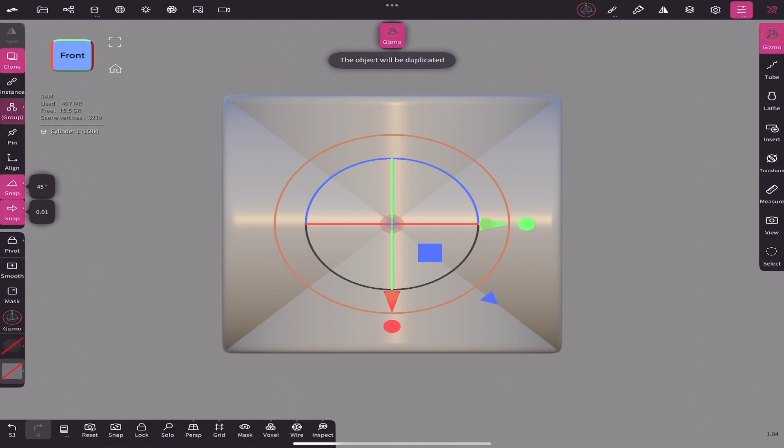Duplicate and rotate. Make sure the snap tools are enabled. Duplicate it, move it to the side, scale it down and validate it. Duplicate it again, flip it to the other side, position the pivot on the center. Duplicate it again, scale it down and move it up.

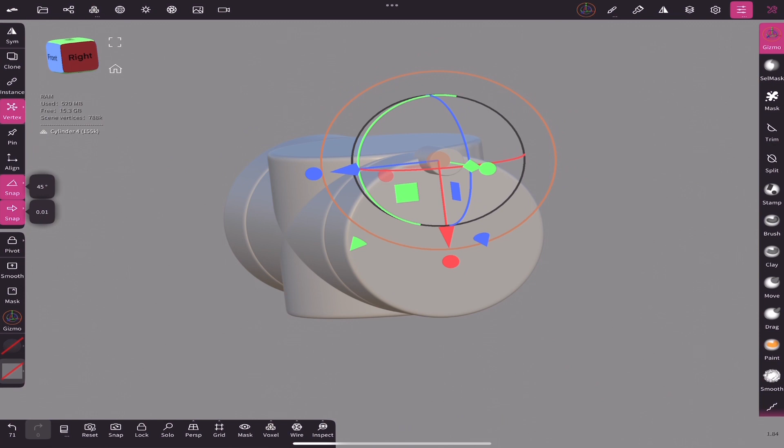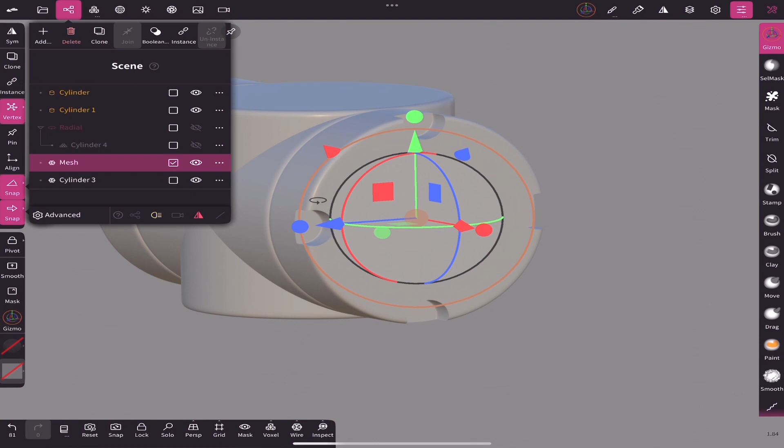Add a radial modifier. Duplicate the radial and the cylinder. Use one of them to punch holes. And use the other one as nuts. Give the cylinder a glossy grey color. Join them together. This will be the servo back cover.

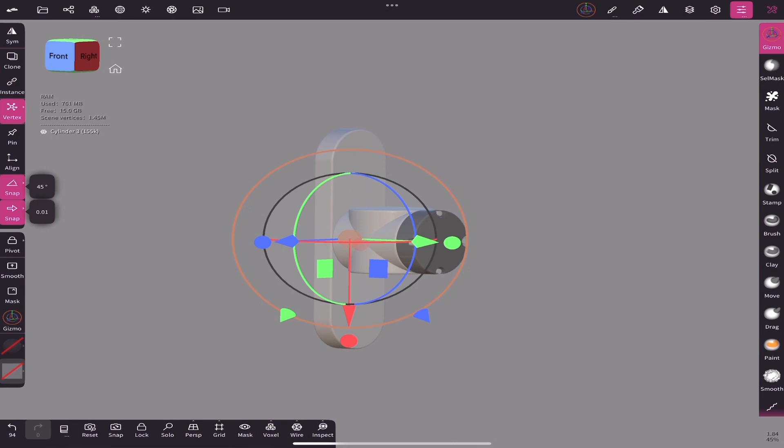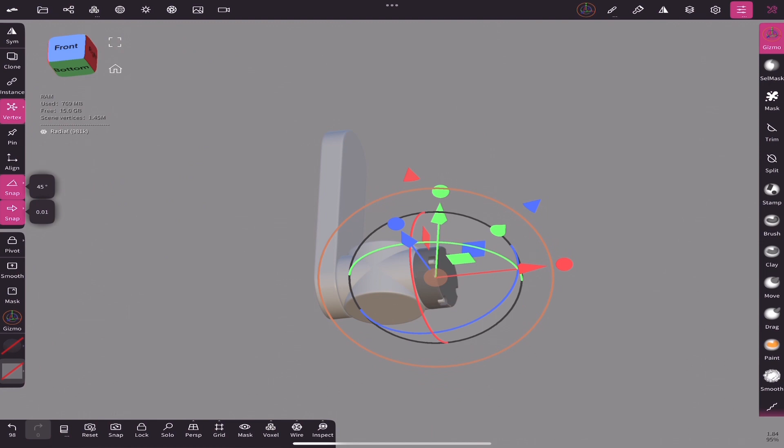Select the opposite cylinder, enable local symmetry and move it down. Disable the symmetry and adjust the position. Move the pivot to the bottom center. Move this cylinder down, then duplicate it and move it down. Join the two cylinders to shape a T-joint. Then center the pivot point.

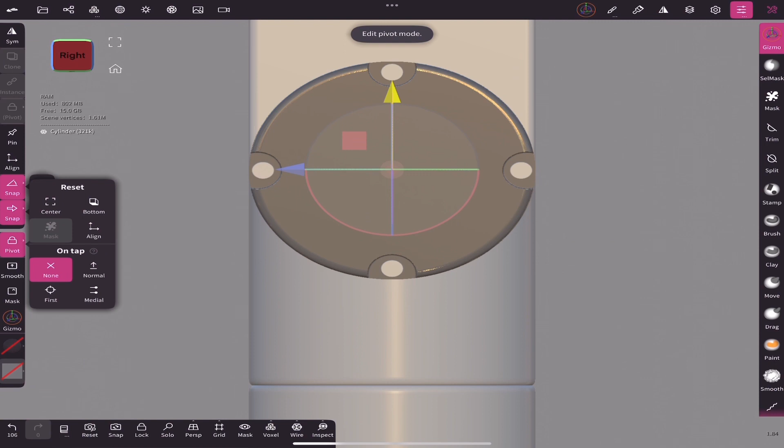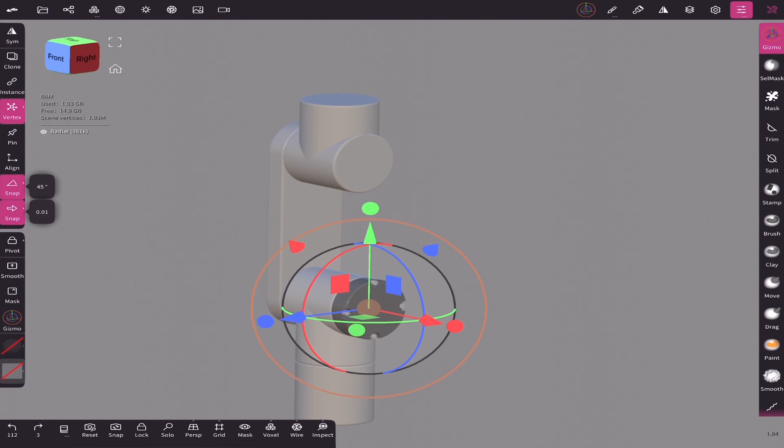Duplicate the T-joint, move it up and rotate it. Select the servo cover, select instance and move it up. If you want to move the instance, don't use the vertex target. We will use the vertex later to change all the servo covers.

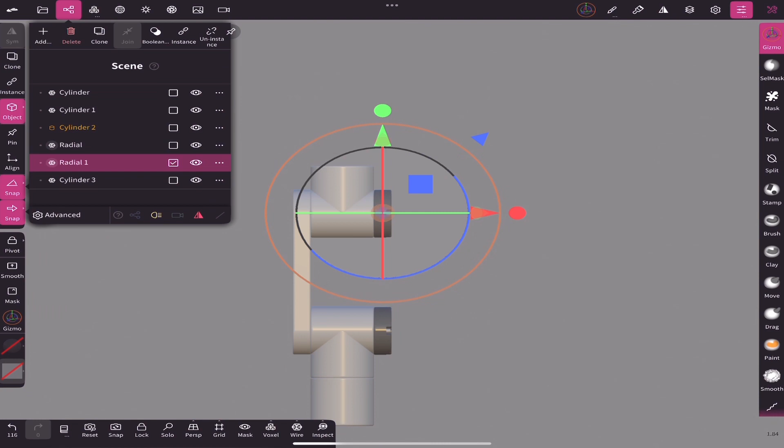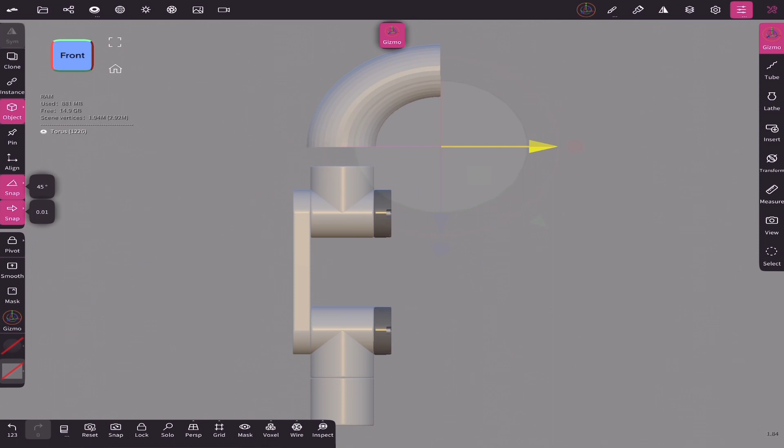Add a torus, rotate it and move it up. Scale it up, increase the inner radius, and to create a 90-degree joint, change the angle to 90 degrees and then change the angle offset to 180. After that, manually adjust the size and the position to align it with the other parts.

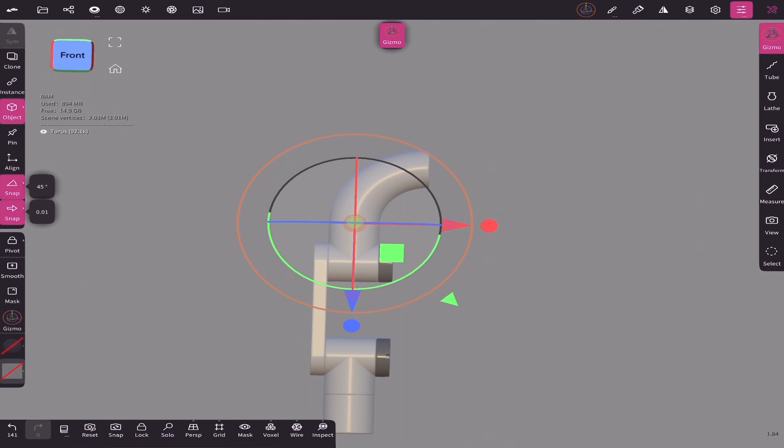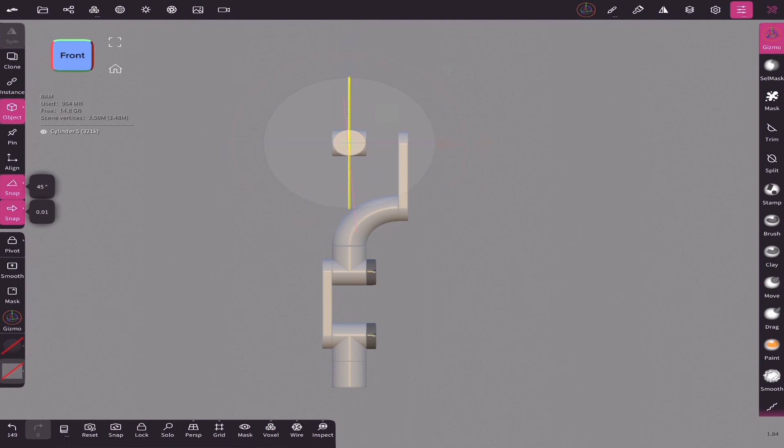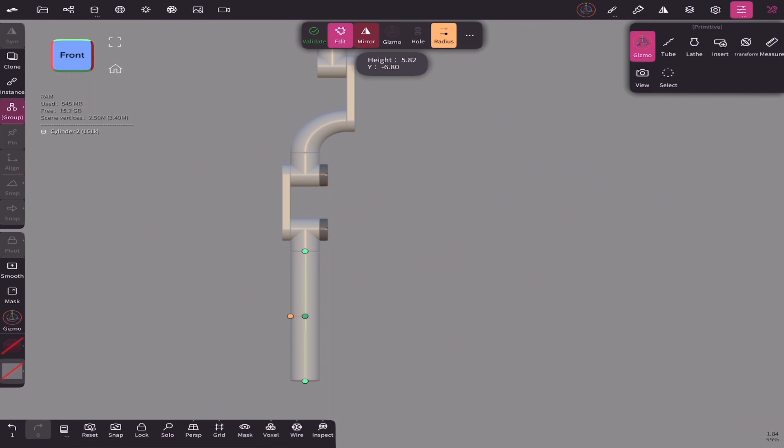Duplicate the long arm and move it up. Duplicate the T-joint and move it as well. Make the bottom cylinder taller. Duplicate it, scale it down and move it down.

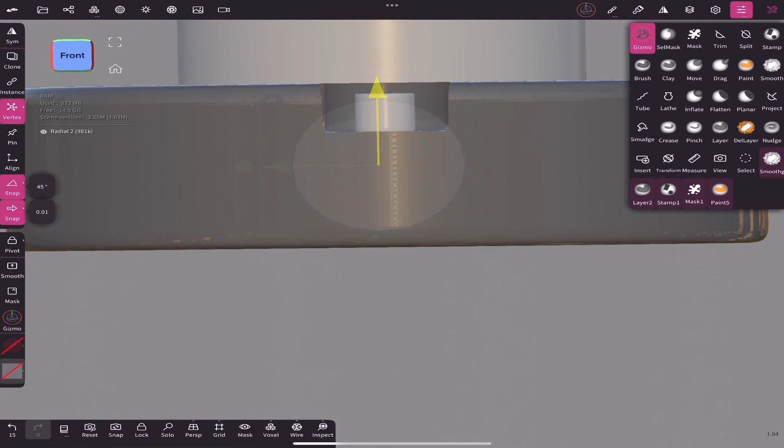Duplicate the servo cover. Don't use instance this time because we don't want this one to be affected later. Move it down, rotate it and scale it up. Select the bottom parts and join them. Put this part in the top of the hierarchy. Create an instance of the servo cover, rotate it and move it up.

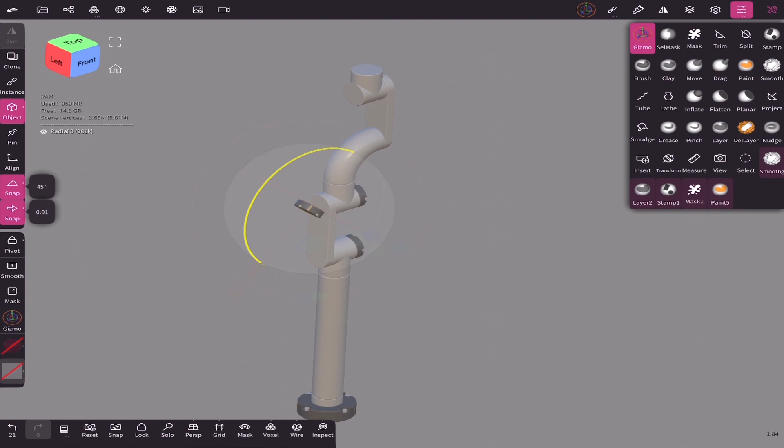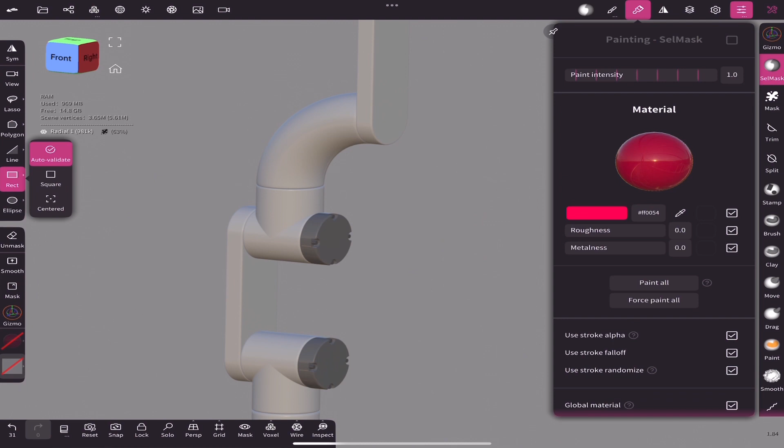Now mask one of the servo covers, invert the mask and select a new color. And as you can see, all the cover instances changed their colors too. Clear the mask, add a new cylinder, move it up and subdivide it 3 times. Duplicate it a few times to make the head, then join the parts.

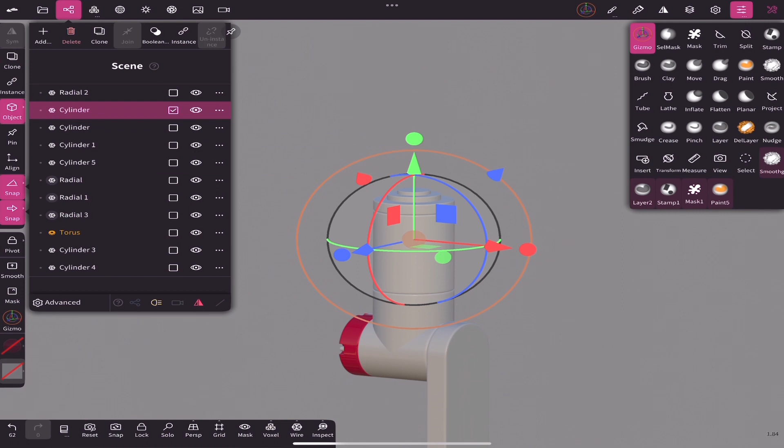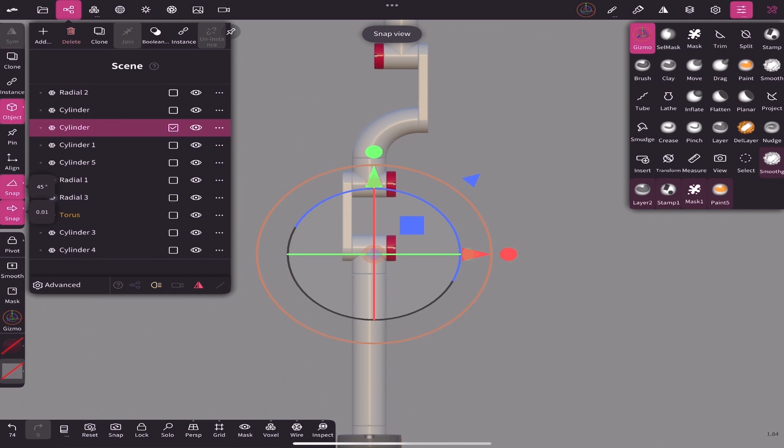Adjust the pivot point. Also adjust the pivot point on the long cylinder. Now join each servo with the cover. But make sure to un-instance before joining them. And adjust the pivot point of each part. Now parent the parts as per the robot parts order.

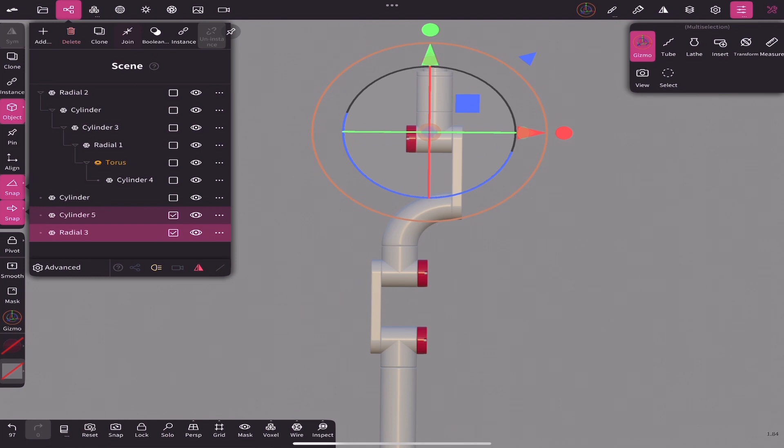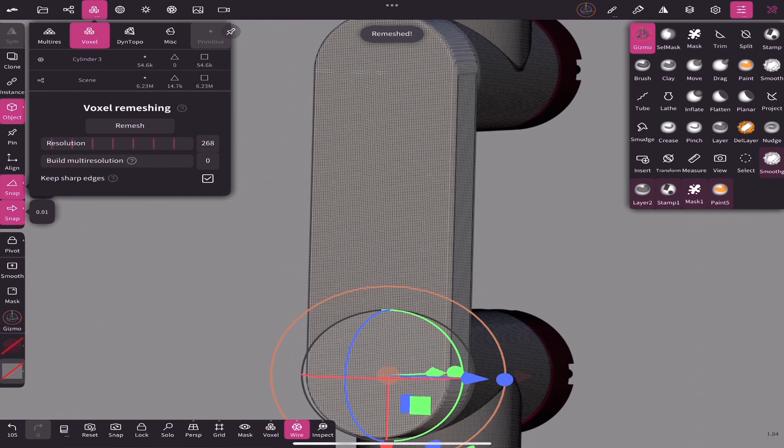And voxel remesh the 2 arms to fix the geometry. Now test the parts' rotation.

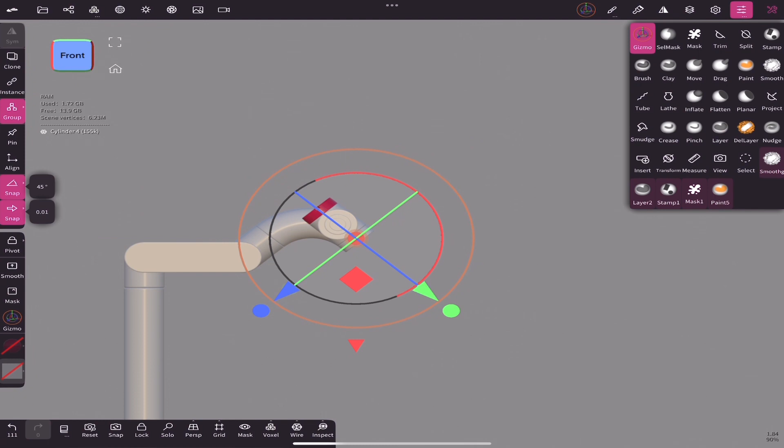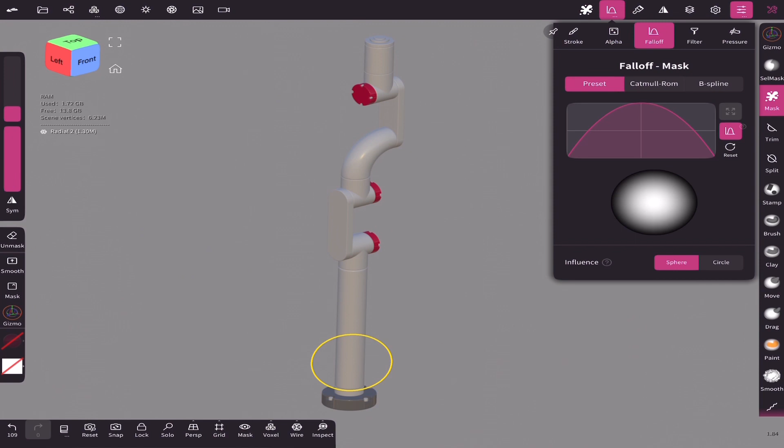One more thing, you can add decals by using the mask tool. Select lock plus radius, change the falloff to 1, select the alpha of your choice, select front facing vertex only, add the mask to the surface, invert the mask and add a new color. Clear the mask and you are good to go.